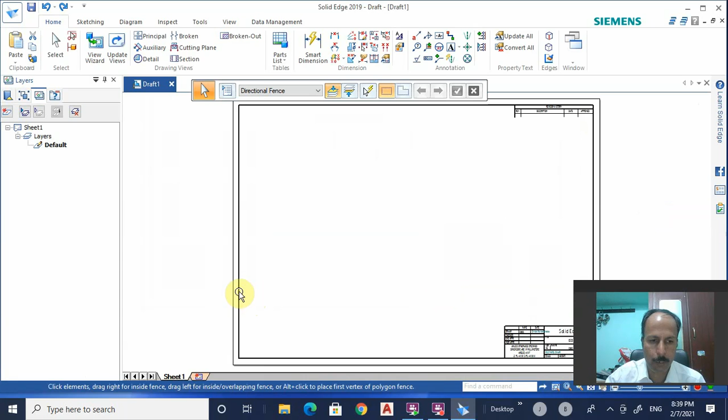Then you need to change the drawing sheet size to A4, then fit it, then make the background sheet visible and the working sheet non-visible. Fit this also. Now let us delete these lines.

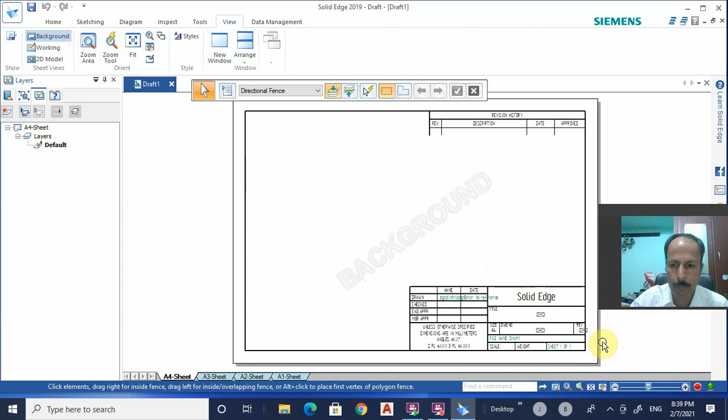This much we will delete, because we want to create a simple title block, not this complicated title block.

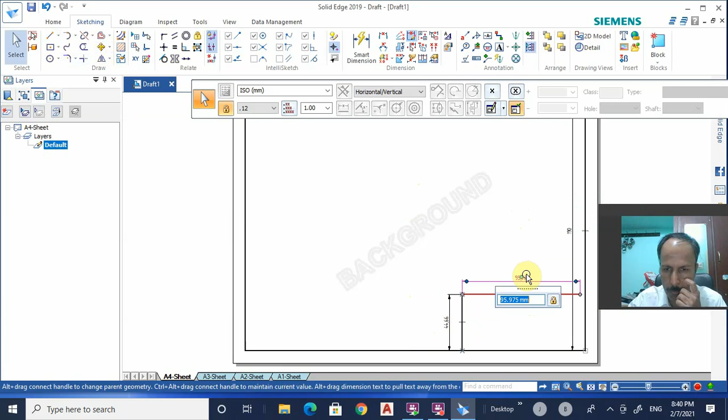So let us draw a line here of maybe any dimension. Let it be any other dimension. So let us move this to the side. We will change this dimension to 70 mm, then this dimension to 44 mm. Okay, then let us move this line and join here.

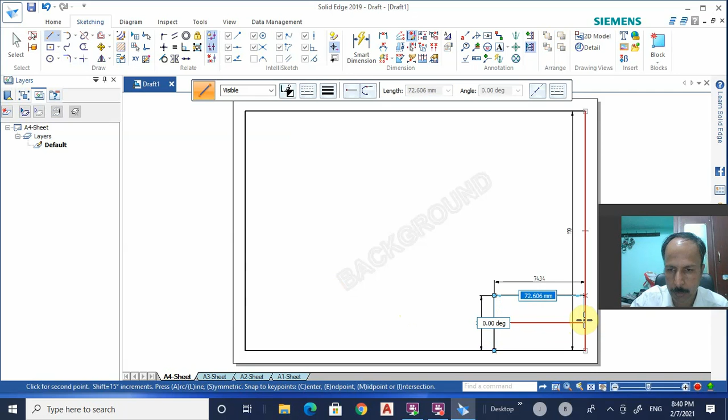For that, select extend to next. It is extended. Then take one more line and let it join. Let us make this also join.

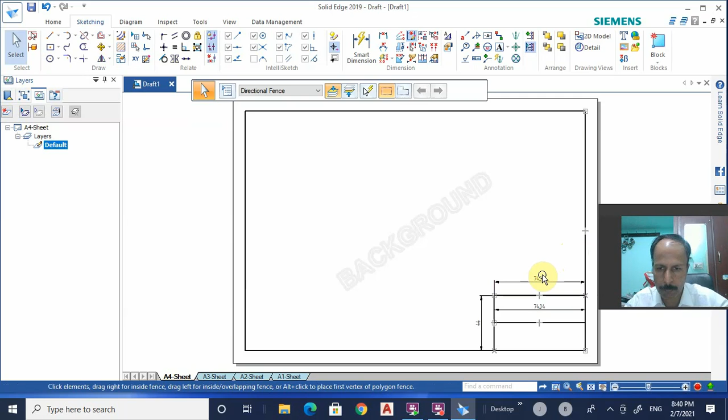Okay, now let us delete these dimensions, we don't need these. This should actually be 70. Should be 70. Okay, this should also be 70. Okay, now it's 70.

Once the dimensions are adjusted, let us delete these dimensions, we don't need them. So here we will write some simpler identification text.

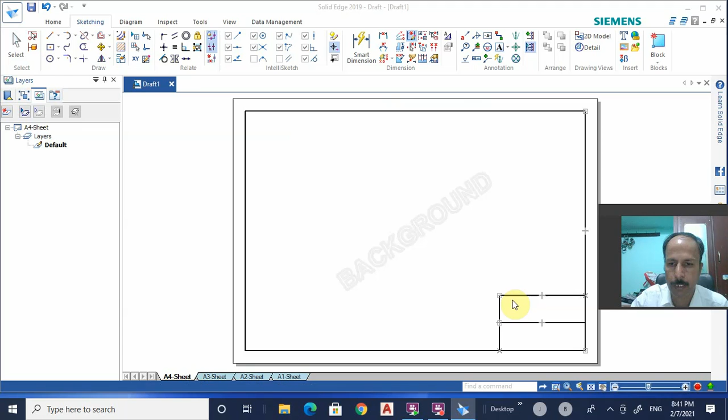Select this, make sure that this is five, and then click here. Then type the name of this drawing, with caps lock on: parts of knuckle joint.

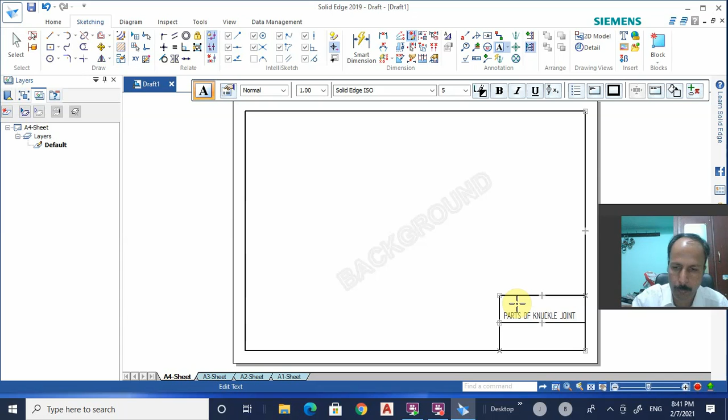And then with dimensions. Maybe you can have some other note, like all dimensions are in mm. You can have whatever you want.

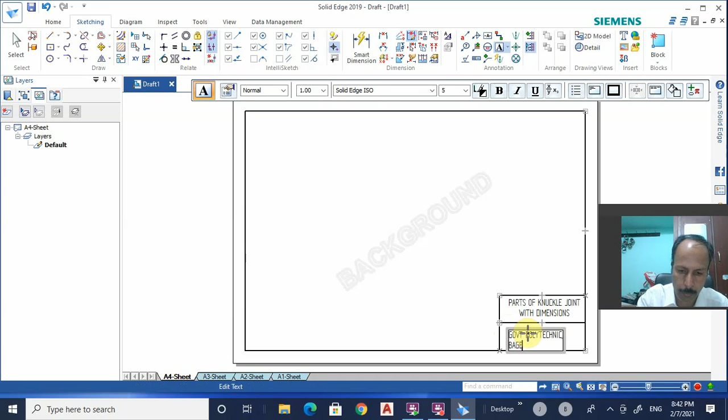Make this dimension centrally justified like this. So let us also type something here, like government polytechnic, move this to center, then make this centrally aligned like this.

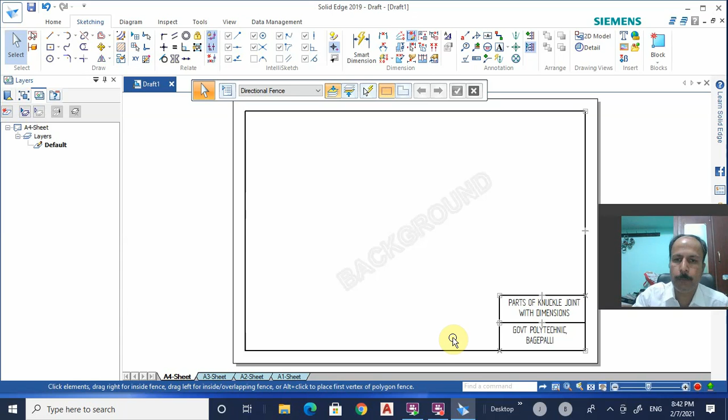So you can create any simpler title block like this. You can also have notes like all dimensions are in mm, all instructions, scale, such things you can put here. But for simplicity, I have not put all those things.

Now we'll go to view, then make the working sheet on and the background sheet off. So now it's okay. Now we will import the parts. Go to home, click view wizard, and navigate to your folder where you have stored all your parts.

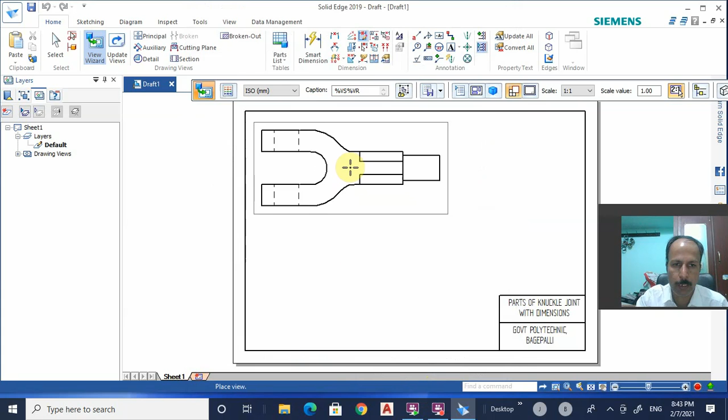So I have stored it in this knuckle joint folder. Let us first take the fork end part, because that is the major part. So I have got it here. You can have 3 different views of it like this.

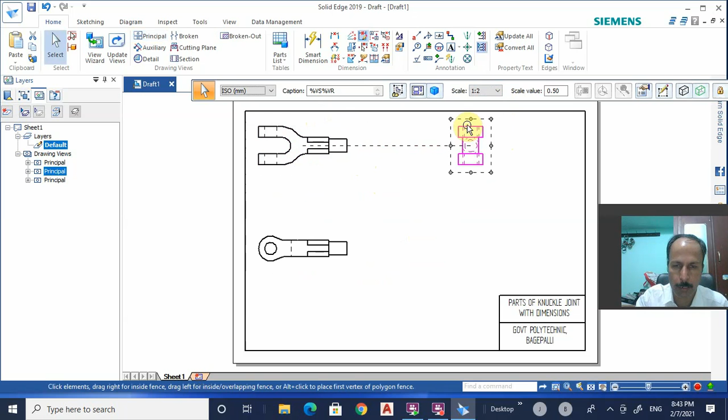So the scale is a little bit bigger, it is 1:1. Let us make it 1:2, because we need to fit still more parts here. So for that reason we'll reduce the scale and move the parts nearer to each other, because we have to put still many other parts.

So now let us first dimension these things. One convention is, as much as possible you have to keep all the vertical dimensions for this sketch, and all the diametrical and top level dimensions in the top view. In the side view, all the side view related dimensions should be in this view.

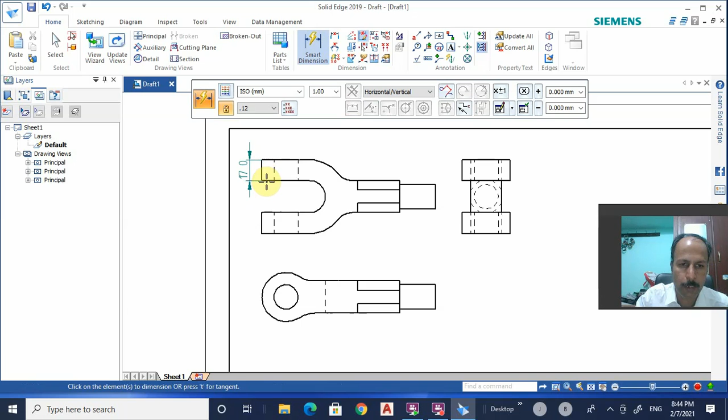So first let us take this smart dimension. Now let us dimension this, then dimension this, then dimension this. Okay, now let us dimension this, this is R13. Then dimension this, this is R30.

This is like this. Now what we will do is move these dimensions a little bit, dimension these things, because they are not clearly visible.

Okay, so we can move this a little bit. Okay, like this. Then we'll also dimension this thing. This is 40. Okay, now, okay then let us have this dimension also. So you can keep those dimensions here in this direction.

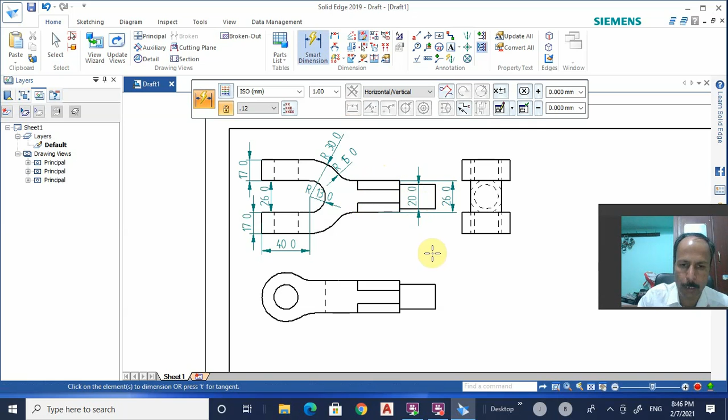Okay, now let us dimension these things. Now let us dimension this. It is showing a radius of 5 mm.

I think I have created all the dimensions. All the necessary dimensions I have created.

So you should not keep your dimensions here on the sketch, but since the available space is much less, we have to keep like this. As much as possible you should not keep them on the sketch; you should have your dimensions out of the sketch.

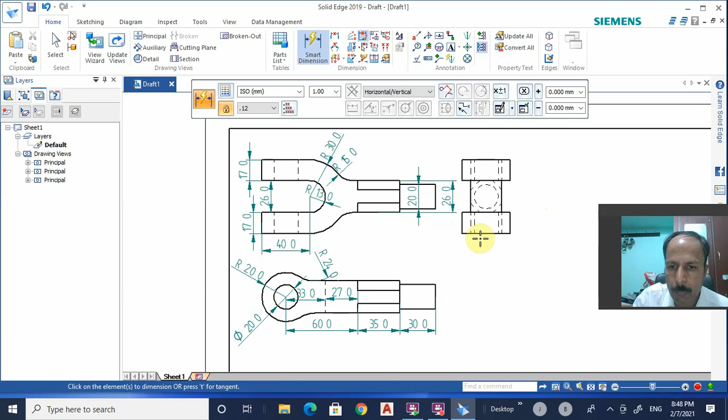So here let us create such dimensions. Then we need to create this dimension.

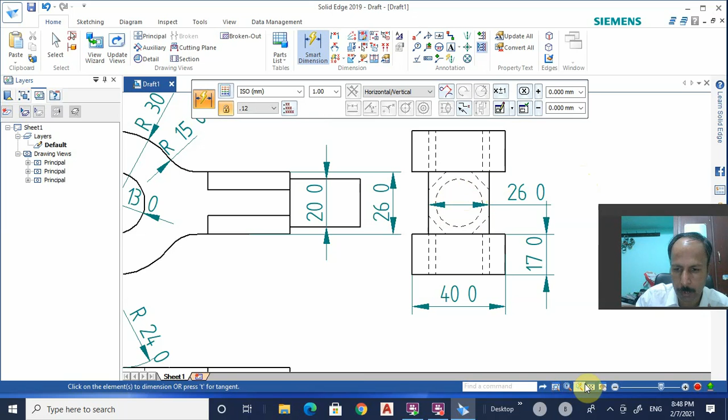We need 26, that is what we want. This dimension we have already done. And what else we need? I think all the necessary dimensions have been taken care of here.

Now let us move to one more part here. I think all the dimensions I did. Okay, this dimension, I think, yeah, it is there. Okay, now let us move to another part.

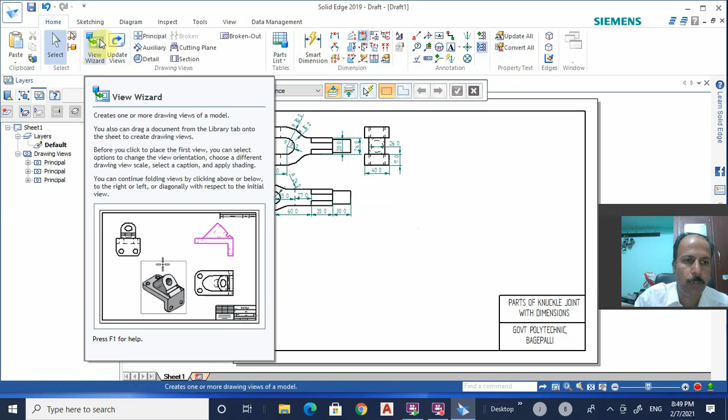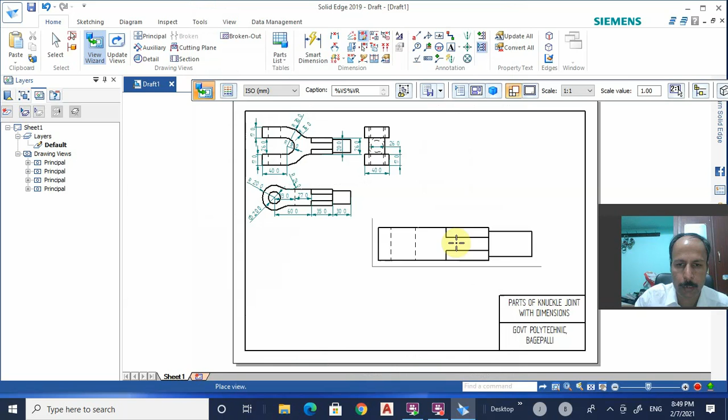Once again you have to click view wizard and then go to browse here. We have taken fork. Now we'll go to the eye end part, select this, then open. So let us keep that here. This is the eye end and this is the fork end.

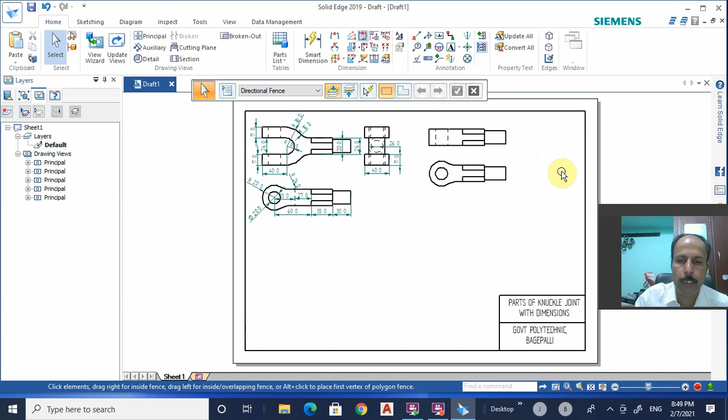So let us make this scale 1:2. Okay, let us move these things closer. Okay, like this. Then we'll go to dimensioning once again, so we have to use the same convention here once again.

Then what else you need? You have to get the dimensions. These dimensions. Then let us dimension this. Let us dimension this.

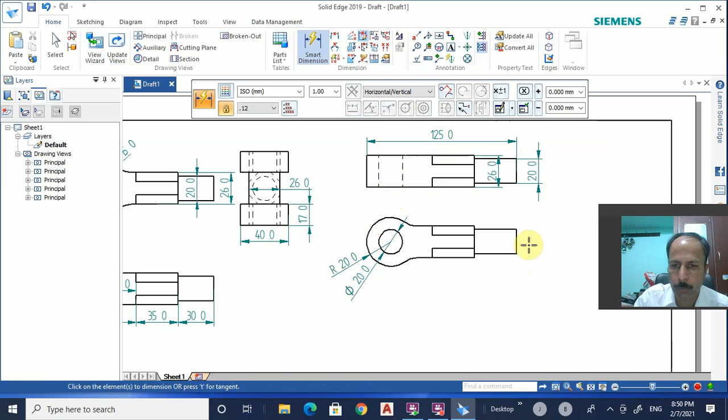Then this is already 20. This is also okay. What else we need? So these dimensions I already did. Okay, then let us...

Dimension this. Let us dimension this. This is all similar to this. What else you need?

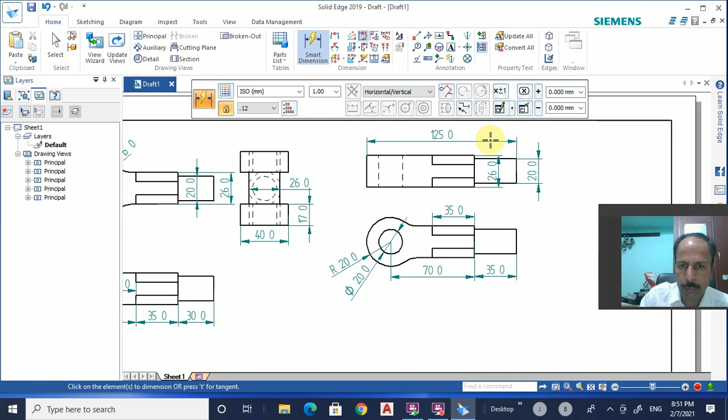Okay, then you might, okay, that is there, on 26. So all the necessary dimensions I think I have done. The overall length is also 125. This is also okay. Now it is time to import one more part.

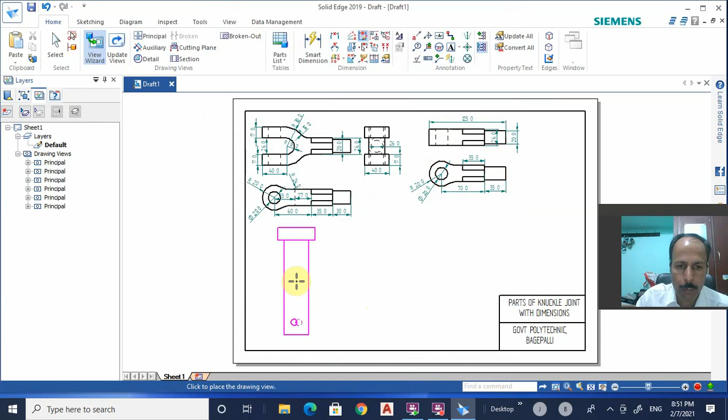Once again click view wizard here, then go to browse, then let us take the knuckle pin part. So this is your knuckle pin part. We can have one more part like this, but you can also rotate this part.

For example, go to sketching, then select this rotate, then select this part, and then like this you can move anywhere you want. Just go down, rotate this part.

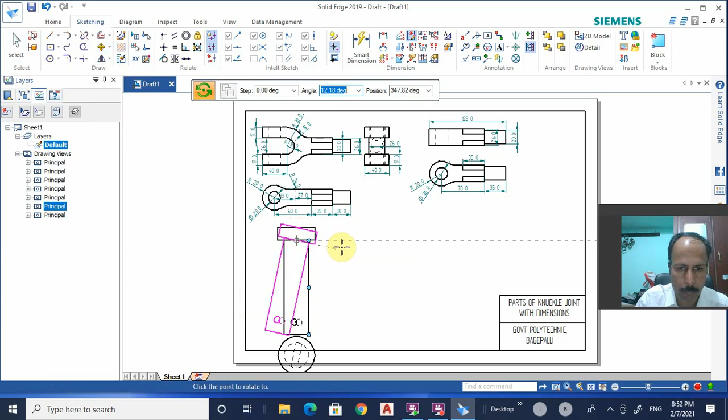Okay, now right, so you can also move this. You can move this down here, and you can move this here. Okay, like this. Then we need to dimension.

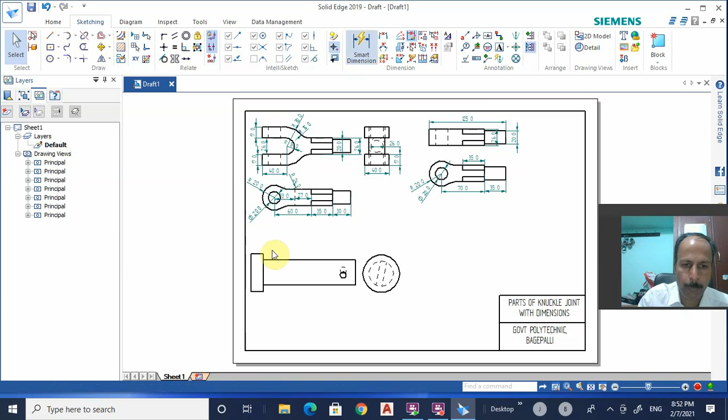Go to dimension, take this, then this dimension, and then this dimension, and then now this is already there, 10, this is already there, 75.

Okay, now you need to dimension this and this. It is 8.33. That is not actually the correct thing. Yeah, it is 7.5 maybe.

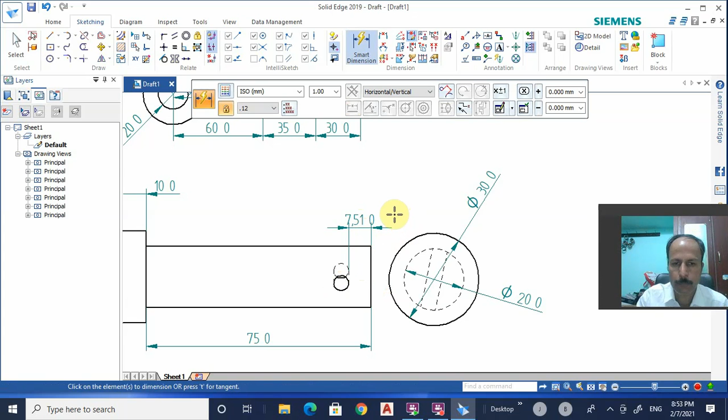Or you can retrieve the dimensions for this part. Select this, go to this retrieve dimension. Okay, it's okay now.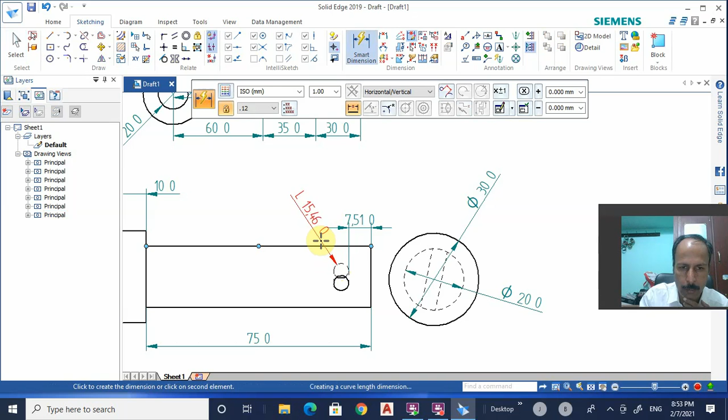This is actually this dimension. Then you can also dimension this. Okay, you can dimension here. Take the 2 points option here, then this, and then click this.

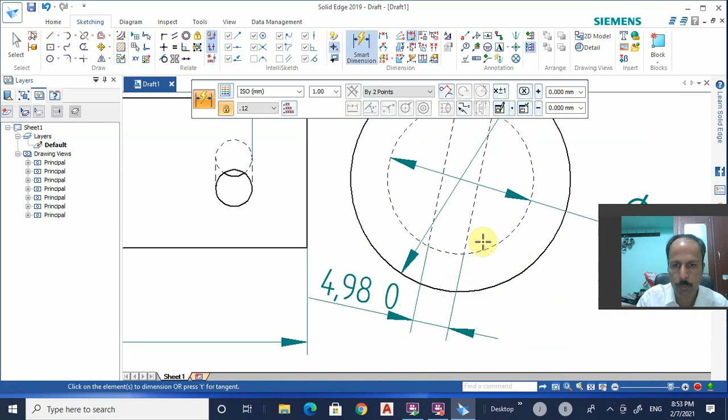Since it is taper, it is showing some other dimension here at one end. It will show some other dimension here like this. It's obvious. Then one more side, it will show some other dimension. It should show actually 4.5 here.

Now it is showing 4.98. It's okay. So we have dimensioned all the things here of the pin.

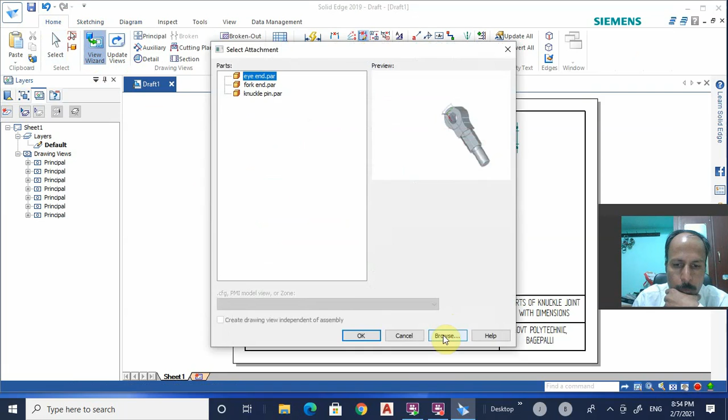Then we'll import one more part. Go to home, so we'll browse. We have now taken pin. Then we'll have the collar here. Collar. Open.

Okay, so reduce the scale of this to 1:2. So it's now okay. You can keep this here, or make these things nearer, like this. Then dimension these things.

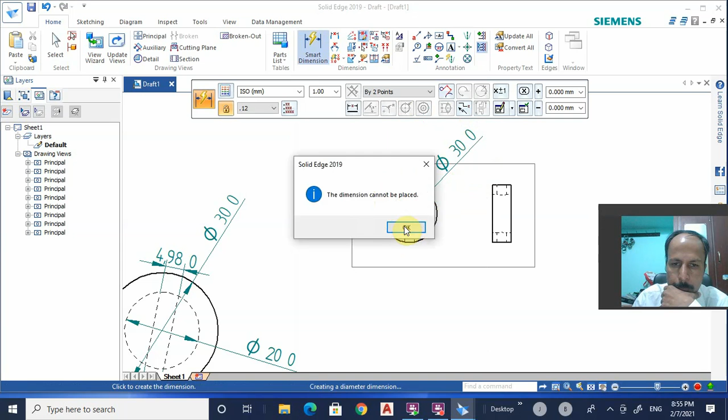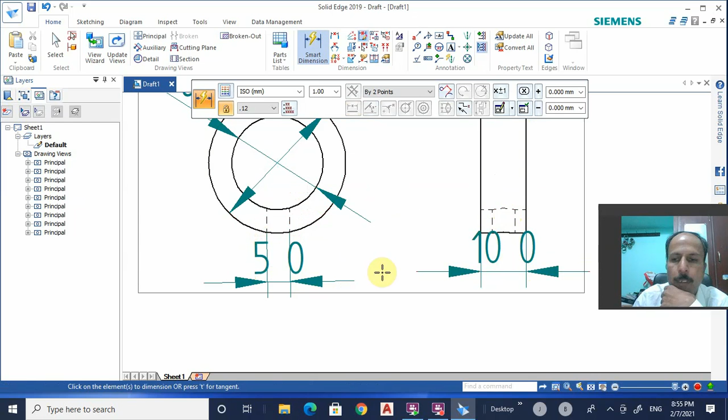Dimension this thing. Yeah, now you can see here it is 5. I think we have put all the dimensions.

Maybe this width we should have to create, but it actually at the center it is 5. Here also it is 5. And then...

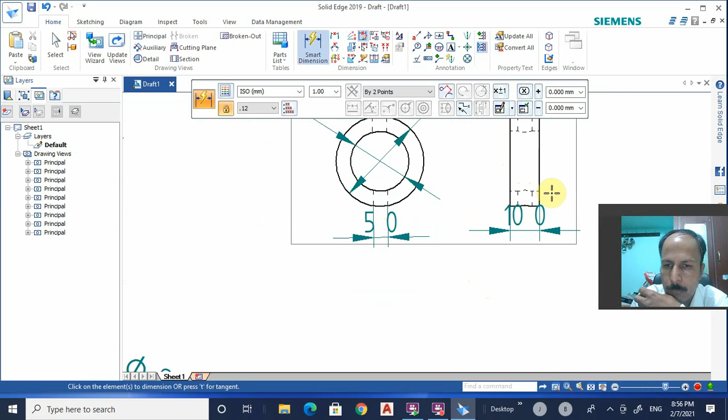Okay, let us, it is 2.5, right? So let us move this dimension a little bit outside so that it is clearly visible, like this. Now fit. So now we have taken one more part here.

Should not get this, so let us delete this. Let us have the principal view of this. Yeah, now it's right.

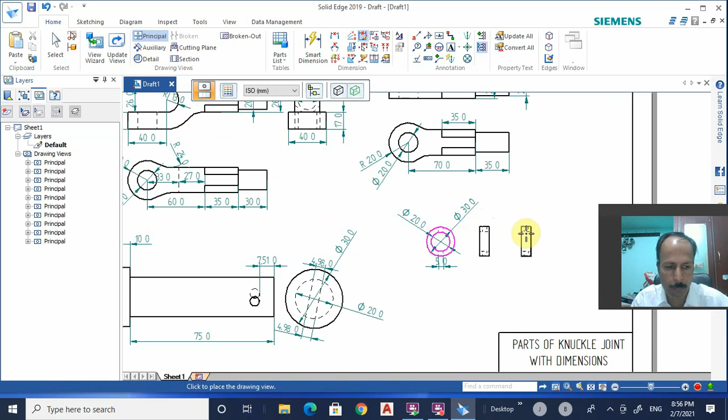Dimension this. That is done. That is 5, we know, but we want a different dimension. Yeah, we want this dimension.

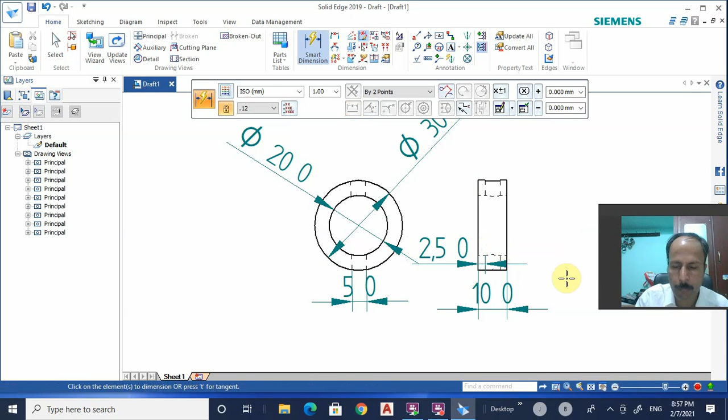You can move this a little bit to this side because the dimensions are a little bit overlapping. Okay, now I think everything is over.

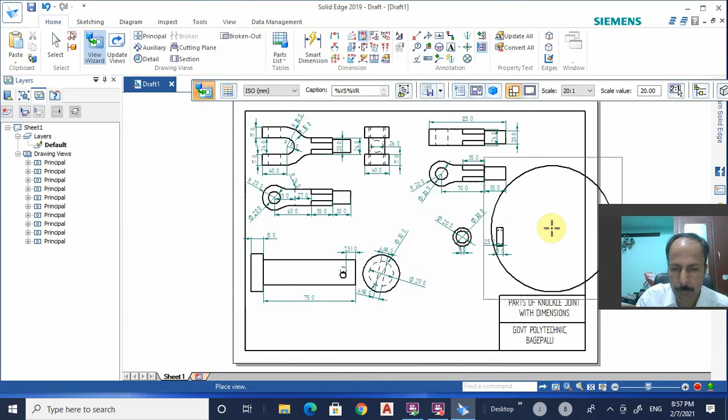We have to once again import one more part, that is pin. So we'll once again go to view wizard and we'll import that. Taper pin we have to import. This part we have to import. So you can keep that somewhere here or here, wherever you want.

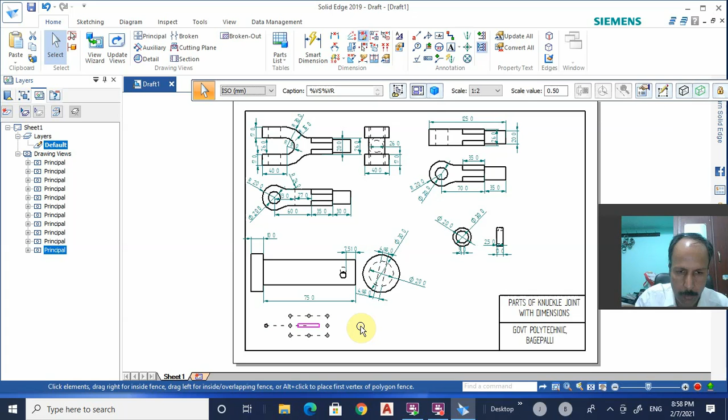So this thing scale is too much bigger, make it 1:2. Yeah, that's right. So let us move this here. Yeah, this is your pin. Let us dimension this also, it should be actually taper, but I have not created taper, it seems.

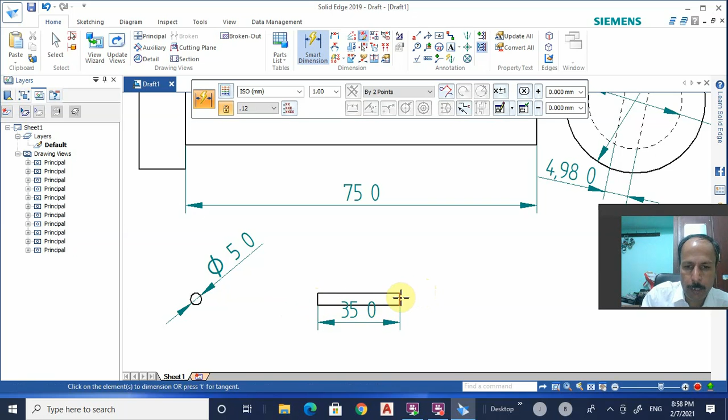So that means that this dimension should be 5 and this should be around 4.98, but in this diagram I have not created any taper pin, but it should be a taper. Okay, you can also create this dimension and you can also create this dimension. It should be 4.98 if it is taper.

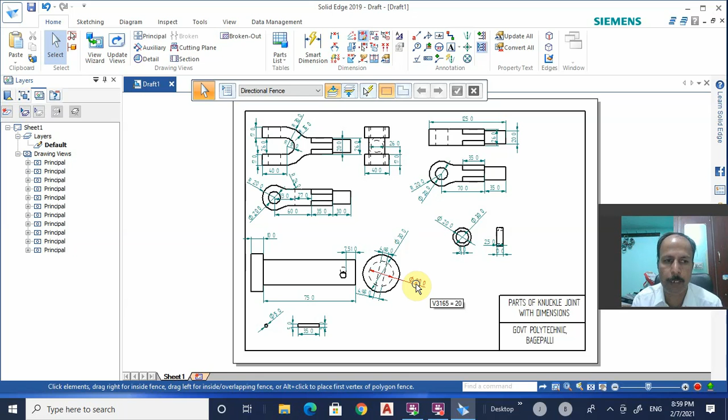Since in this diagram I forgot to create a taper pin, it is showing both the sides equal. Okay, anyhow, this is how you can create all the parts of an assembly drawing into a single drawing sheet. Thank you, students.